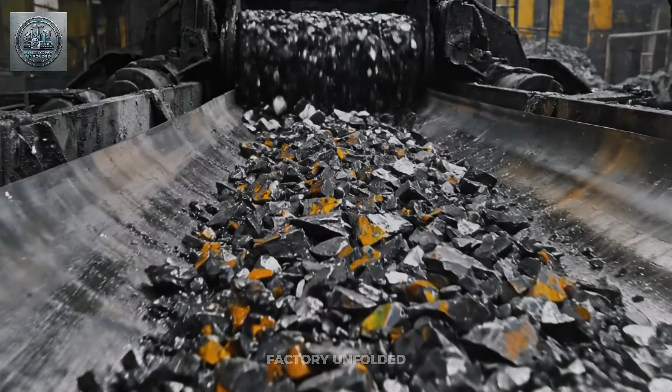200 million. That is a number that can make us pause in absolute silence. 200 million is the number of steel oil drums discarded globally in just a single year. If we laid them end to end, that rusting ribbon would wrap around the earth not just once, but 15 consecutive times. Look at the massive scrap yards scattered on the outskirts of every civilization.

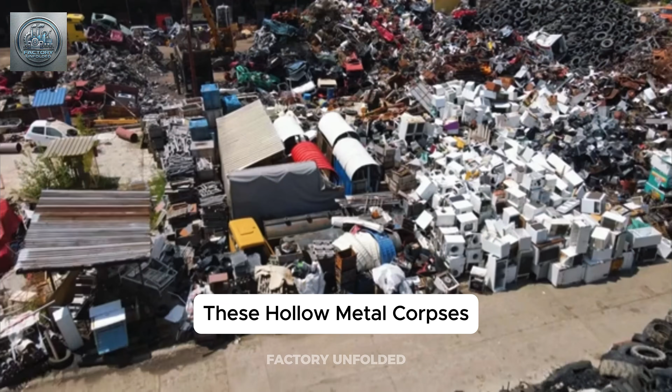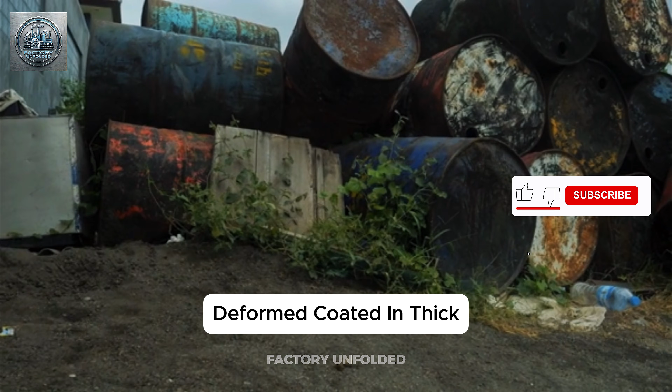These hollow metal corpses, which once held millions of gallons of lubricating oil for the global economic machine, now lie there, crushed, deformed, coated in thick, toxic chemical residue. Under the scorching summer sun and the acidic rains of winter, they oxidize, slowly decomposing in a terrifying stillness. In the eyes of most of humanity, that is the cruel end of an industrial life cycle. It is waste. It is a colossal burden that this planet is forced to carry.

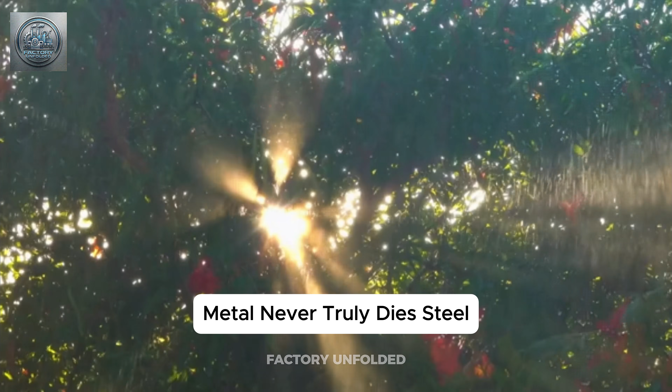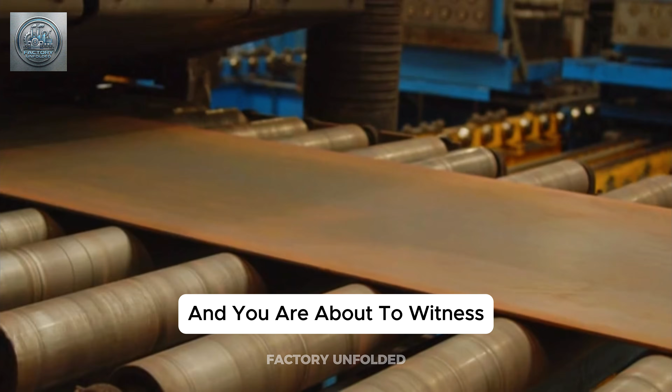But nature always has its own laws, and so does metallurgy. In the eyes of material masters, metal never truly dies. Steel is one of the very few substances in the world that possesses an ultimate privilege, the capacity for immortal rebirth. And you are about to witness a true miracle of modern civilization. No visual effects, no embellishments. Only harsh reality and glorious reincarnation.

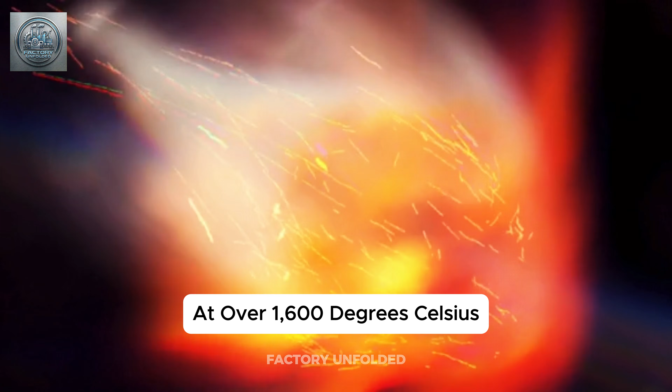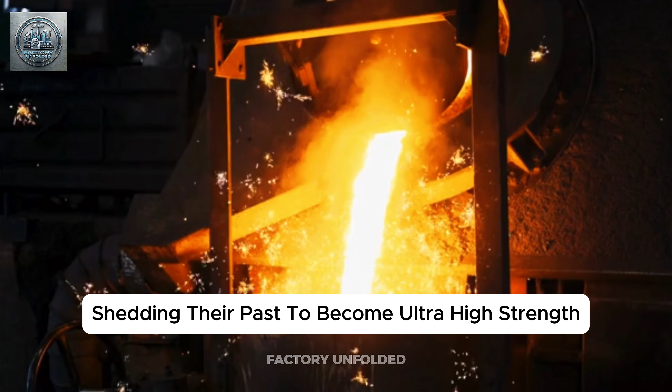Today, we will take you deep inside one of the greatest forges of the 21st century. A place where what was once considered the dregs of society, the filthiest scrap, will be forced to walk through a crucible of fire at over 1,600 degrees Celsius, only to rise from the depths of those ashes and molten magma, reborn, shedding their past to become ultra-high-strength alloy steel rails, the steel arteries of the earth. They will bear the weight of thousands of tons of freight trains, connecting desolate lands and reshaping the future of mankind.

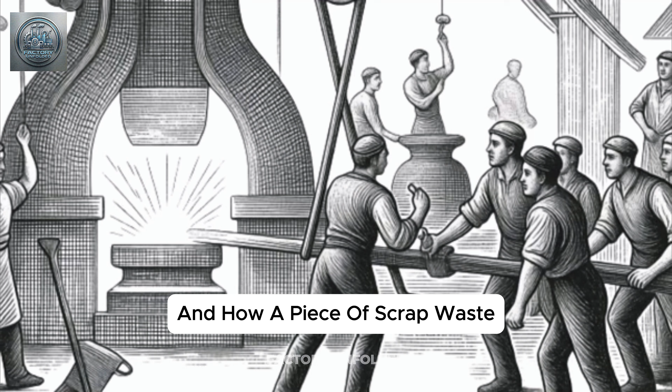Let us step back into the past for a moment, to turn the sweat-drenched pages of heavy industry's history, to understand who the men were that turned this alchemy into reality, and how a piece of scrap waste can become the backbone of an entire world.

The shape of the modern world we live in was not drawn with ink. It was carved into the Earth's surface by railway tracks. But to achieve the flawless design and absolute durability we see today, history had to learn lessons paid for with immense time and blood. Let us return to the early 19th century.

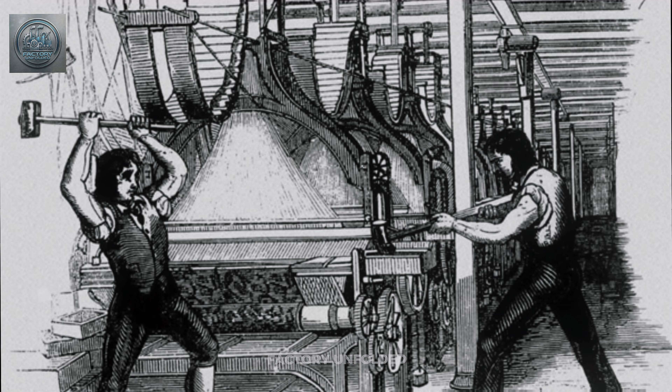Humanity's first rails were cast from iron, a hard but incredibly brittle material. Under the continuous strain of primitive steam engines, they cracked and shattered like massive shards of glass, leaving tragedies in their wake. Until 1836, an English civil engineer named Charles Vignoles brought an eternal silence and safety to the iron wheels.

Staring at the shattered iron rails, Vignoles designed the flat-bottomed rail, a classic design with a cross-section resembling an inverted T. It was not merely a drawing. It was a terrifyingly perfect calculation of physical mechanics.

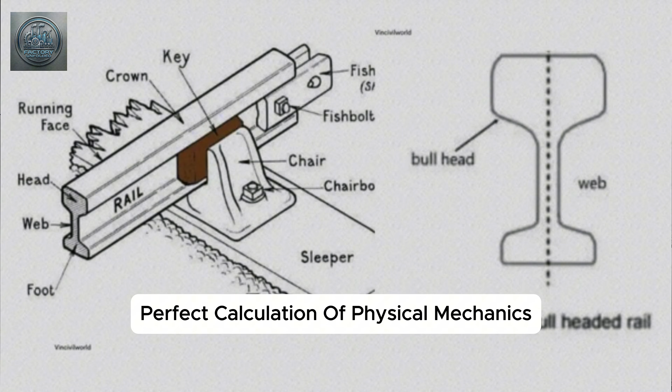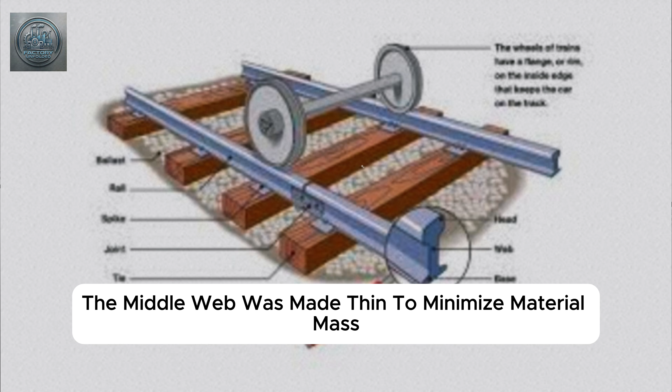The base was widened to grip securely and distribute force down to the wooden sleepers. The middle web was made thin to minimize material mass, and the top head bore a flawless curve to perfectly embrace the contact surface of the train wheels, neutralizing friction and enduring the repetitive stress of millions of tons. Nearly 200 years have passed, countless technologies have evolved, but Vignoles' cross-sectional design remains virtually unchanged, as an eternal monument to perfection.

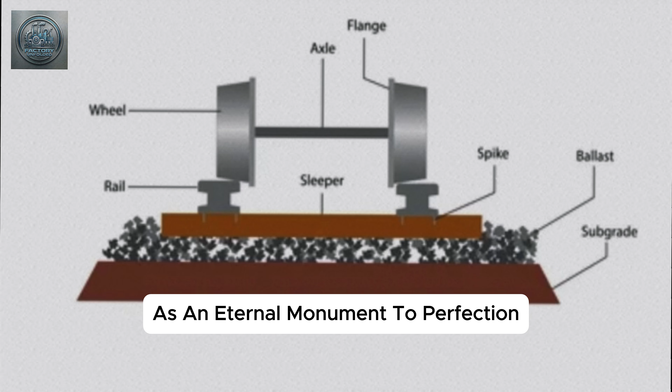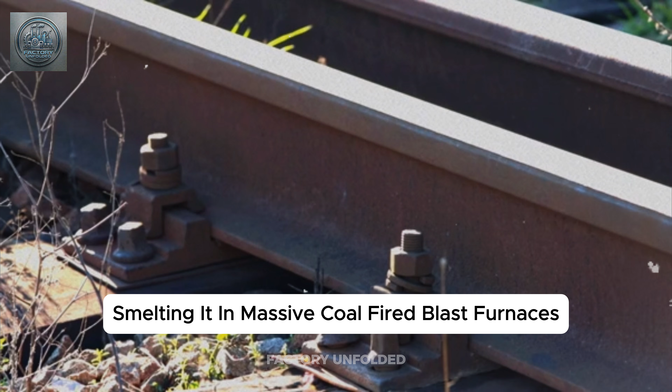However, a great design was not enough. The source of the material was the most daunting enigma. Extracting iron ore from deep within the earth, smelting it in massive coal-fired blast furnaces, demanded a horrific devastation of the natural environment. Humanity needed a way to resurrect what was old.

The man who provided the key to decipher that enigma was Paul Héroult, a French chemical engineer. In 1900, he successfully invented the electric arc furnace, EAF. Héroult did something his contemporaries considered magic. He did not use coal. He did not use firewood or oxygen to melt metal.

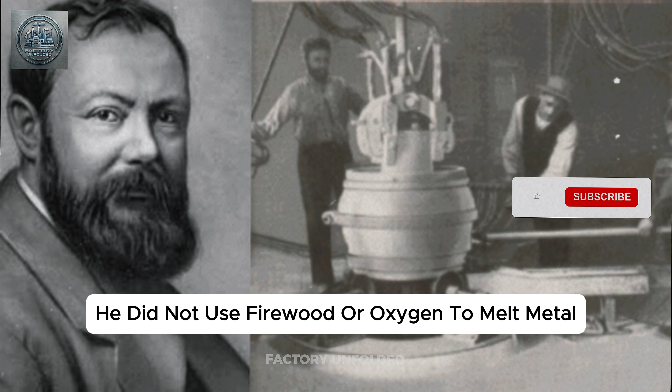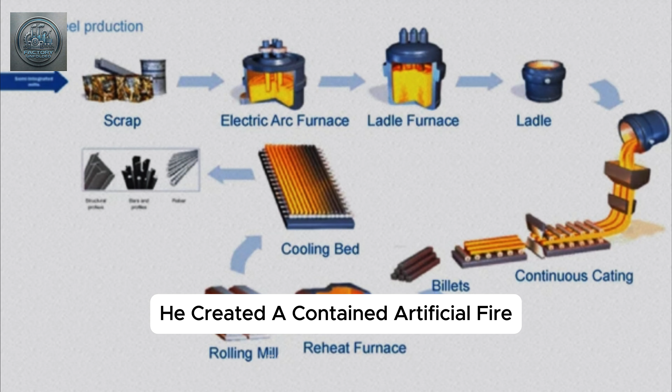He used lightning. By sending extreme high-current electricity through massive graphite electrodes, he created a contained artificial fire, a silent plasma arc carrying temperatures equal to the surface of the sun. This monumental, smokeless, and quiet invention by Héroult laid the foundation for today's massive steel recycling industry. He granted humanity a profound power, the power of reincarnation. And now, in the midst of the 21st century, let us witness how beautifully and ruthlessly that power is executed.

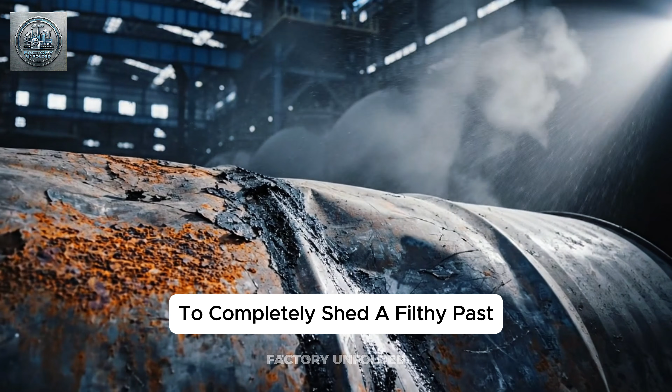The process of rebirth never begins with gentleness or ease. To completely shed a filthy past, these scrap drums must pass through the most ruthless purgatory modern mechanics can forge. Thousands of rusting drums, filled with lubricating oil residue, peeling paint, and stagnant industrial chemicals, are hoisted into the air by a colossal electromagnetic crane.

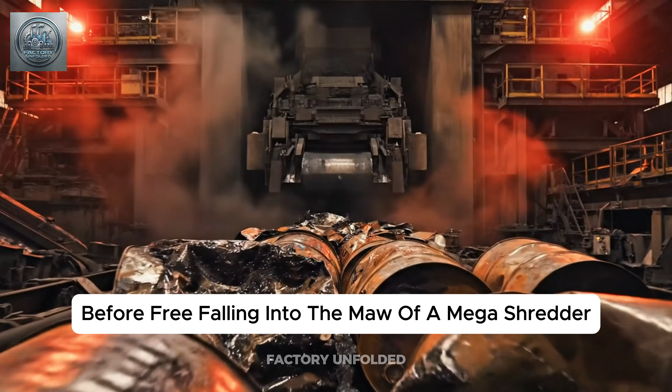They hover for a moment before free-falling into the maw of a mega-shredder weighing hundreds of tons. Inside this dark machine lies a matrix of razor-sharp alloy steel gears, rotating with torque so immense it could chew up an intact truck in mere seconds. The silence of the scrap yard is officially torn apart.

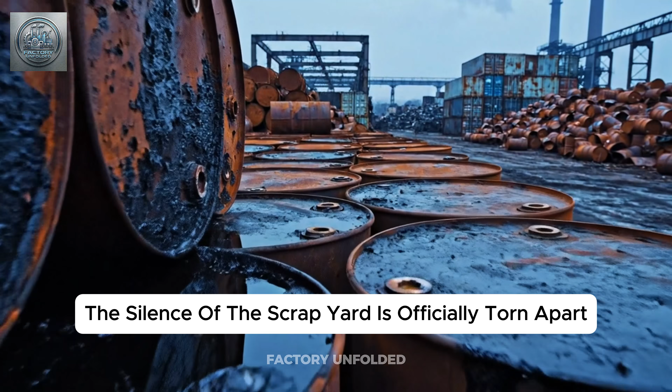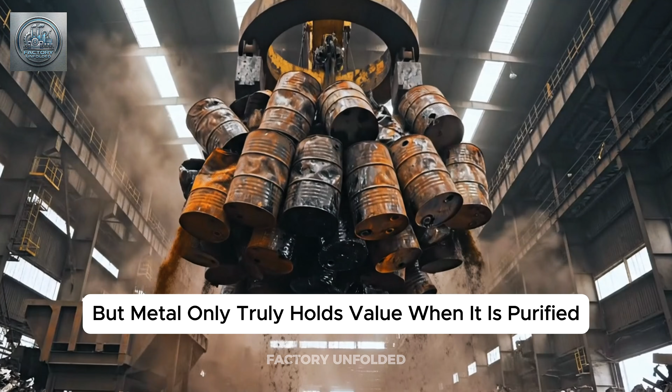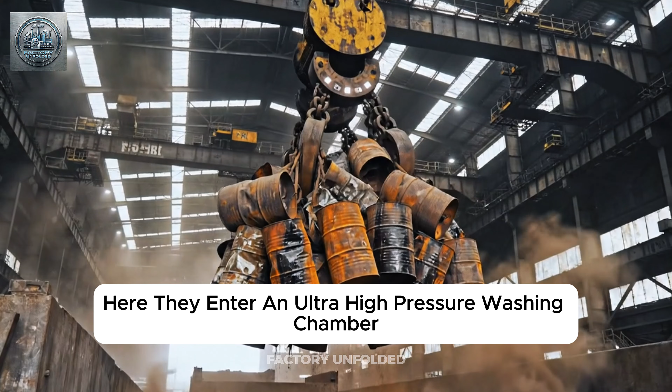In the darkness of the machine, the groans of metal cry out. The bodies of the drums are ripped, shredded, twisted, and pulverized into shapeless fragments no larger than a hand. Every physical structure of their former life is obliterated, but metal only truly holds value when it is purified. Emerging from the shredder, the sharp fragments continue their crawl along a vibrating conveyor belt. Here, they enter an ultra-high-pressure washing chamber.

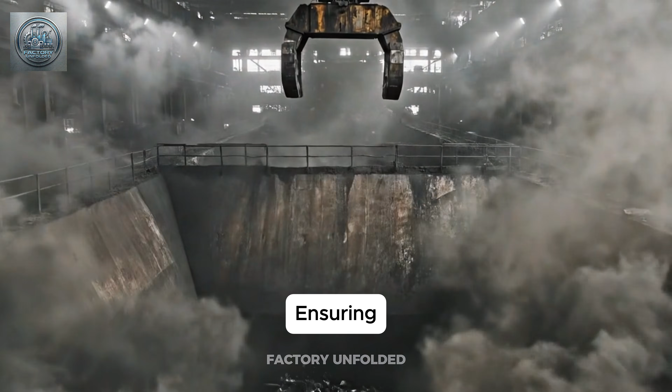Jets of water slash down like blades, combining with biosolvents to mercilessly strip away years of stubborn grease and toxic paint residue. Every ounce of filth is collected and isolated into a closed-loop treatment system, ensuring not a single toxic drop escapes into the groundwater.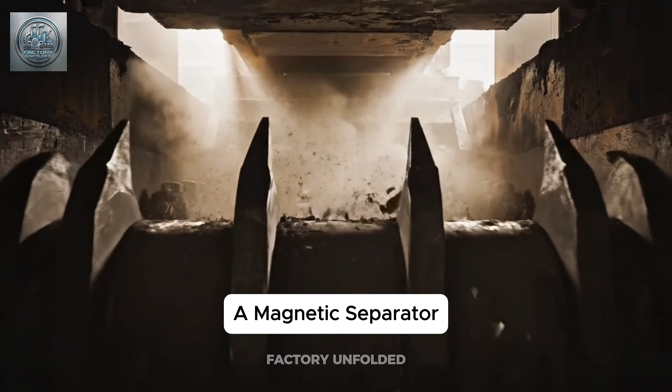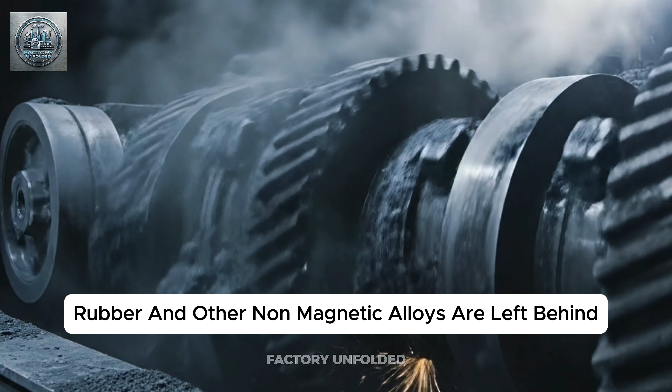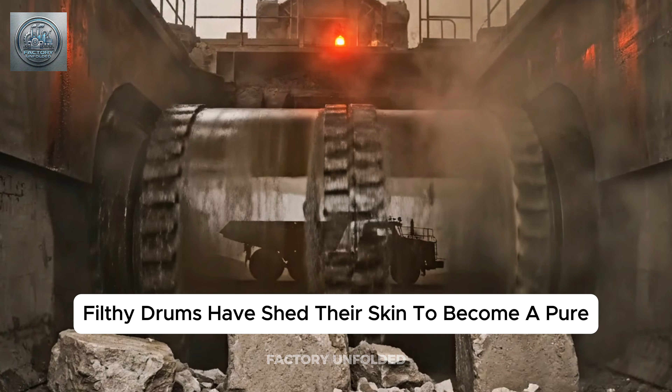Once cleansed of the mud, the soaking river of scrap steel passes under a magnetic separator. A massive electromagnetic drum rotates slowly above, acting as a silent judge, gliding over the waterfall of scrap, gently but firmly lifting only the purest steel fragments into the air. Meanwhile, dirt, plastic, rubber, and other non-magnetic alloys are left behind, falling into a secondary sorting system below. At this moment, on the conveyor belt, what were once blackened, filthy drums have shed their skin to become a pure, raw material, sparkling clean under the factory's high-intensity lights.

They have washed away the sins of the past, ready to face the fire of the gods.

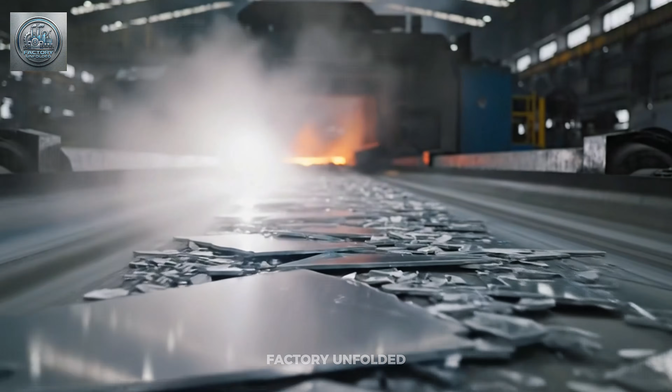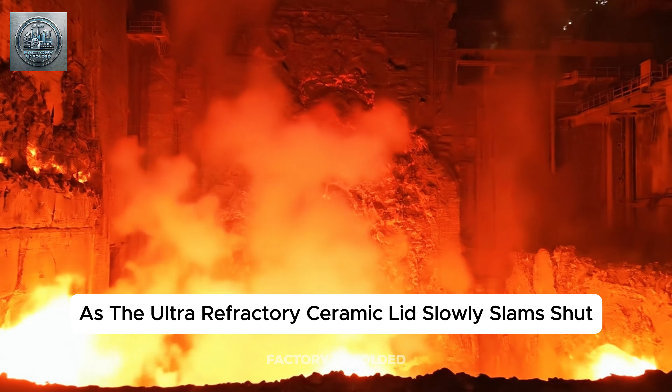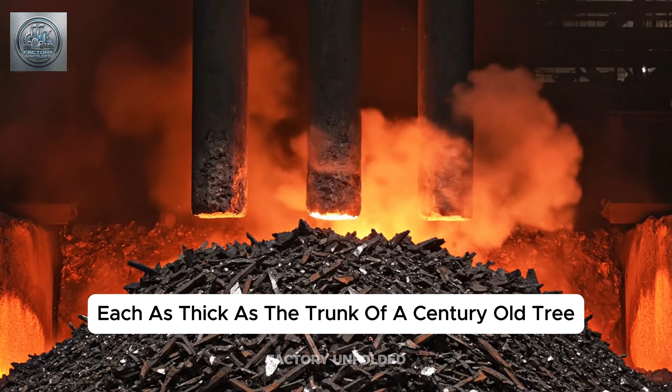Thousands of tons of pure scrap steel cascade with a roar deep into the chest of the electric arc furnace, the EAF. This is a cavernous space where the laws of solid-state physics are about to entirely collapse. As the ultra-refractory ceramic lid slowly slams shut, darkness descends. From the ceiling, three massive graphite electrodes, each as thick as the trunk of a century-old tree, slowly lower toward the surface of the scrap mountain. Then, a current carrying tens of thousands of volts, harboring enough power to illuminate a bustling city, is unleashed in a millisecond. An electrical arc, a blinding artificial lightning bolt, strikes the very heart of the metal.

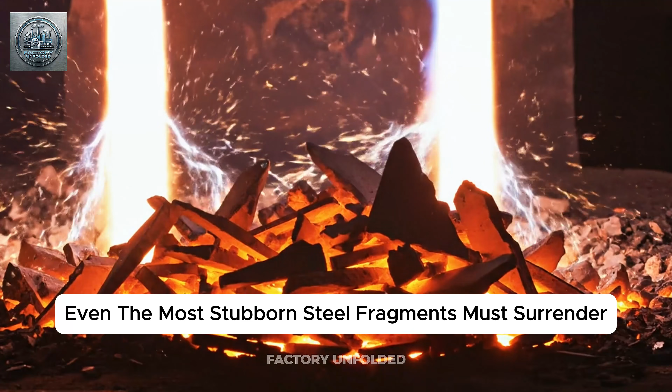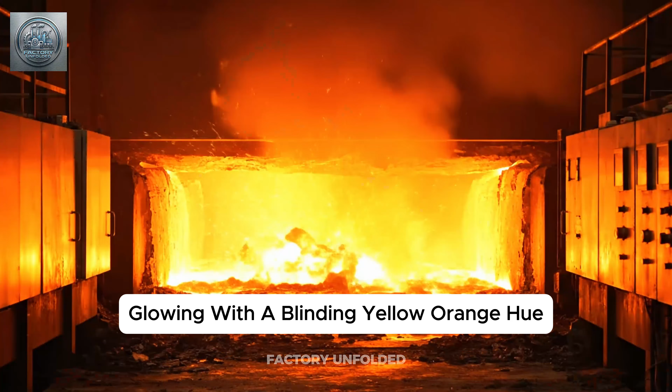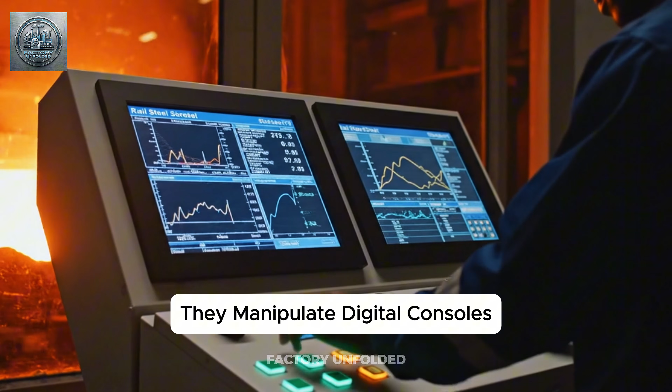But the steel meant for railway tracks cannot merely be ordinary carbon steel. It must be a flawless entity, capable of withstanding the most extreme pressures and brutal wear. This is where the microscopic alchemy of modern metallurgy begins. Engineers do not rely on magic. They manipulate digital consoles, gently introducing incredibly pure compounds into the magma, calculated down to the thousandth of a gram.

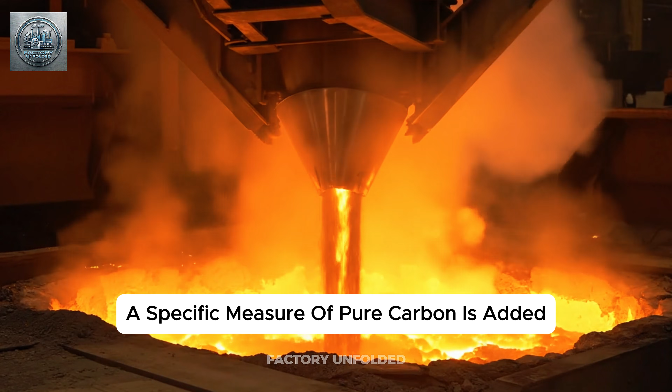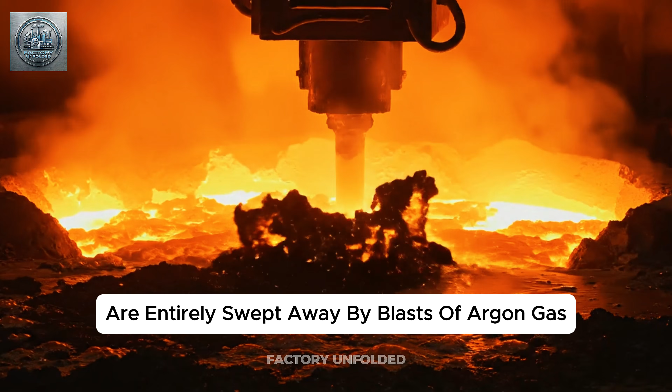A specific measure of pure carbon is added to forge absolute hardness. A touch of manganese is dissolved to enhance endurance and ductility, preventing fractures in sub-zero climates. A precise injection of vanadium refines the microcrystalline structure. Oxygen bubbles and floating slag impurities are entirely swept away by blasts of argon gas. From a pile of rusted waste, the machine has refined the purest metallic bloodline.

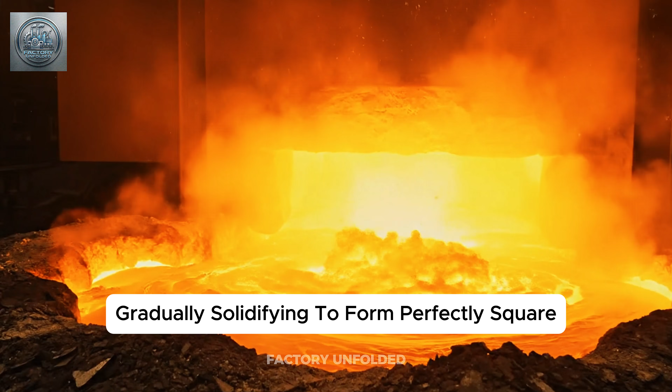The fiery liquid steel is poured slowly, smoothly into the continuous casting molds. It flows downward, gradually solidifying to form perfectly square, dense steel billets. Even in their solid state, they remain glowing red, emitting a fierce thermal radiation that warps every beam of light around them. The soul of the railway track has taken form. Now, it is time to shape its body to carry the world.

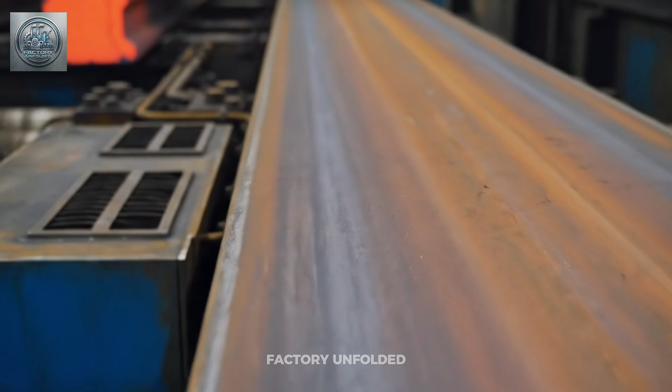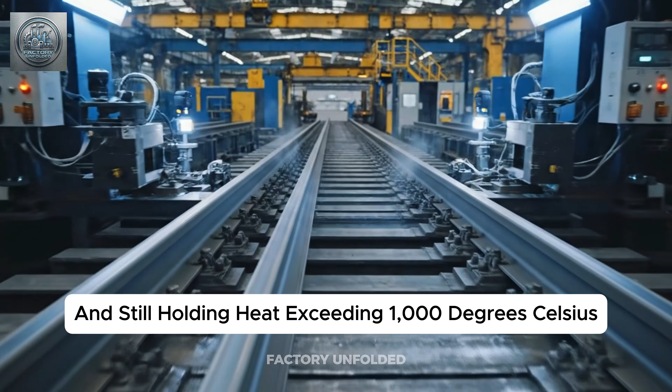Steel billets, dozens of meters long and still holding heat exceeding 1,000 degrees Celsius, begin to glide smoothly along silent steel rollers. They head straight into the heart of the rolling mill. Here unfolds a grand dance of brutal power and microscopic precision.

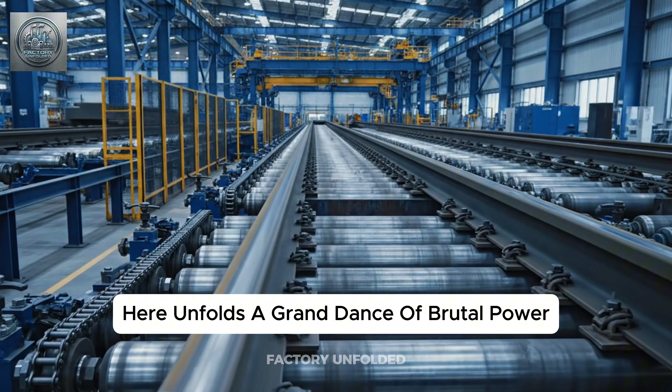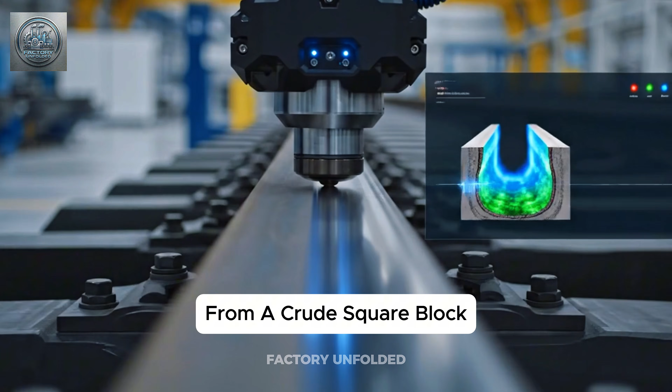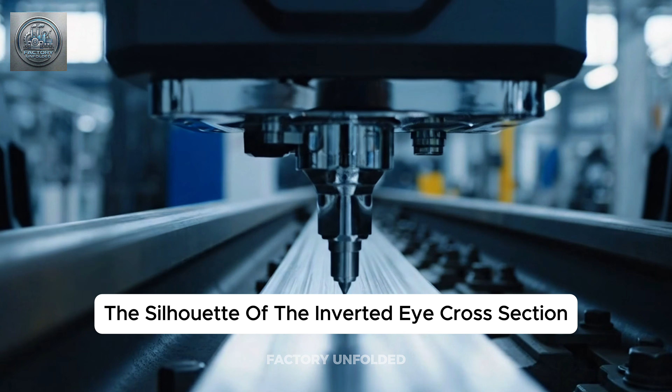The glowing red billet is fed between a series of massive, ultra-hard alloy rolling stands. With each pass through a narrower gap, a hydraulic force of thousands of tons gently kneads, stretches, and permanently alters its structure. From a crude square block, the steel is gradually pinched at the waist and flared at the ends. Slowly, the silhouette of the inverted eye cross-section, the great invention of Charles Vignoles, proudly emerges, stretching for hundreds of meters. Over 100 meters long, straight as a flaming arrow, the rail glides onto the cooling bed.

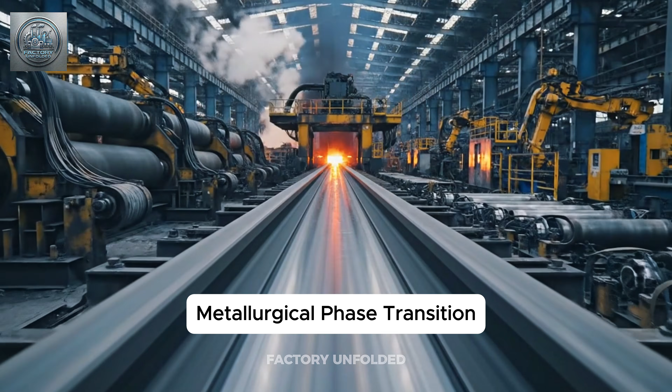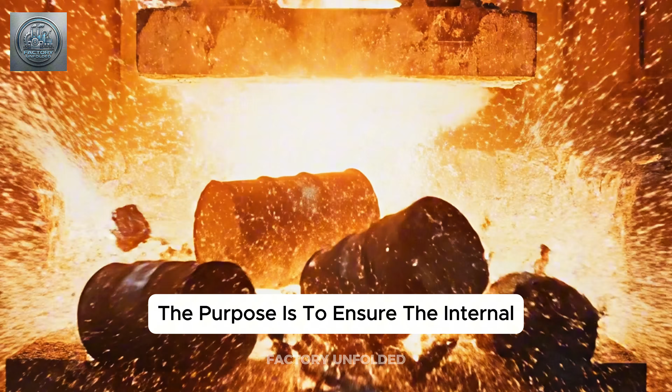The cooling process here is never permitted to happen hastily or naturally. It is a complex metallurgical phase transition from austenite to pearlite, with temperatures strictly controlled by AI algorithms. The purpose is to ensure the internal crystalline structure of the steel shrinks evenly and perfectly, creating absolutely no internal stress that could cause warping during use. Once returned to room temperature, the rail dons a cold, authoritative dark gray.

In the final stage, an automated ultrasonic testing machine glides over the entire surface. Invisible sound waves pierce through the solid steel core, searching for defects or microfractures even one-tenth the width of a hair. Only rails possessing an absolutely flawless atomic mass are permitted to step out of the factory doors.

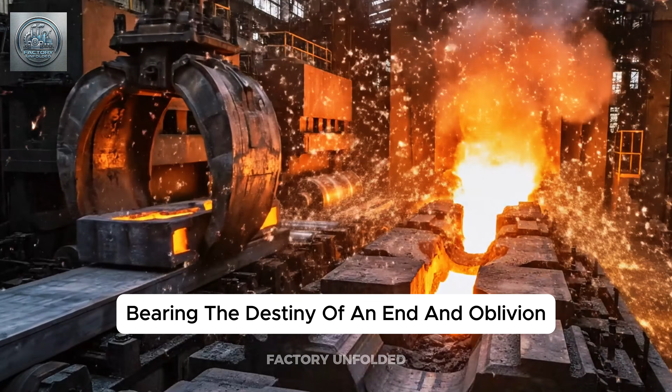Let us look back on a long journey of reincarnation, from shattered, rusted drums forgotten in some dark corner of the world, bearing the destiny of an end and oblivion. But through the brilliant minds of humanity, through the silent fire of the electric arc and the molding of thousand-ton presses, they refuse to die. They have been reborn. Tomorrow, these steel tracks will be shipped away.

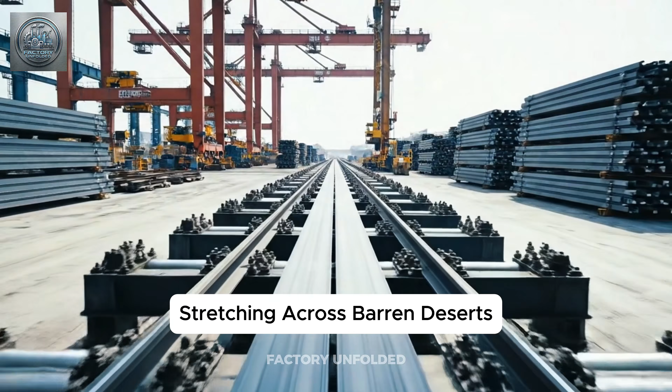They will be embedded into solid beds of ballast, stretching across barren deserts, piercing through eternal snowy mountains. They will carry on their shoulders millions of lives, colossal freight, and the tireless dreams of mankind. They will lie there, still and silent, enduring every storm, yet holding within them the immortal strength of time. Waste was never the end. It is merely the beginning of a far greater cycle, and that is how our civilization endlessly moves forward.